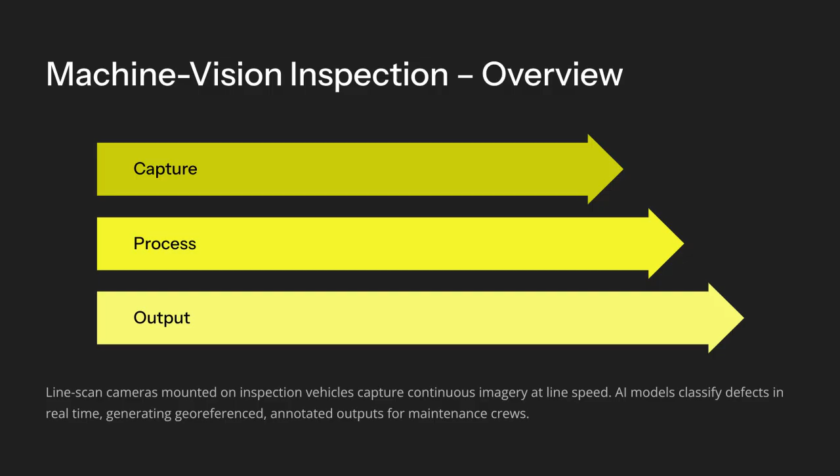And finally, there's the interpretability problem. When the AI flags a section of track, it's often a black box. It can be very hard to debug exactly why it made that choice. But don't worry, as we move through this lecture, we are going to cover the specific assurance strategies to tackle every single one of those challenges.

Now, let's look at the first pillar of RAMS, reliability. In this context, we are talking about the system's ability to do its job without failing. On the positive side, AI vision systems can be a massive boost for reliability. They can spot early-stage defects, things like hairline cracks in the rails, tiny flat spots on a wheel, or even slightly corroded fasteners that a human inspector might miss or that are just too subtle to see on a single pass.

By catching these issues weeks or even months before they reach a critical threshold, maintenance teams actually have the luxury of time. They can plan and execute repairs during scheduled downtime, which means fewer surprises and fewer unexpected in-service failures. But this reliability isn't guaranteed. We face three major technical hurdles.

The first is misclassification. This is the classic false negatives, where the AI model looks at a cracking rail and says it's healthy. If the inspection misses that defect, a failure will eventually happen in service. This usually happens because the training data wasn't diverse enough or because the model wasn't tested against enough real-world messy scenarios. To assure this, we need rigorous validation on data that actually represents the real world, combined with constant accuracy monitoring.

The second challenge is distributional shift. Imagine a model that was trained perfectly for standard gauge tracks in the UK. If you take that same model and deploy it on a network with different rail profiles or fastener types, its performance can drop unexpectedly. The solution here is a core concept we have mentioned before, the operational design domain or ODD. You have to explicitly define the exact conditions where that model is valid, and you must test it on data from the new domain before you trust it.

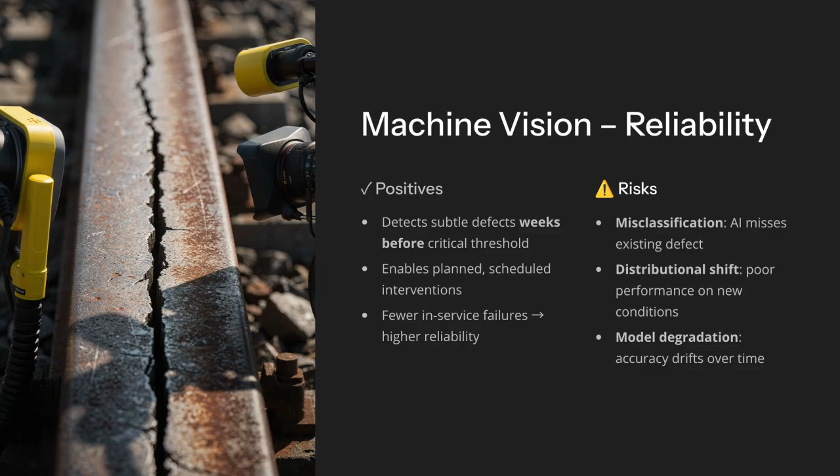So, the big RAMS takeaway here: to keep reliability high, you have to validate extensively before you go live, define your ODD clearly, and never stop monitoring once you're in operation. Next, we have availability. In the real world, this is all about how much of the time our tracks and trains are actually open for business.

On the positive side, AI is an absolute game changer for availability because it removes the human labor bottleneck. Think about it. A traditional manual inspection team might cover 100 kilometers in a week if they're lucky, but an AI vision system can run 24/7 on unmanned vehicles at full mainline speeds. A single system can cover over 300 kilometers in a day. Because you can inspect the entire network so much more frequently, you catch degradation early. This translates directly into more time for planned maintenance, fewer emergency interventions, and ultimately better availability of your trains.

However, there are some specific availability killers we have to design against. First, there's the risk of a single point of failure. If you rely entirely on one AI system or one set of cameras and that system goes down, your entire inspection capability collapses. You can't let your maintenance strategy be that fragile. You need redundancy, multiple inspection vehicles, and a clear, graceful degradation plan, like having fallback schedules for manual inspection if the tech fails.

Second, and this is a big one, is the problem of false positives. If your AI is oversensitive and starts flagging shadows as critical cracks, your maintenance teams are going to waste thousands of hours investigating non-issues. This is the efficiency paradox. If the AI is too noisy, it actually reduces availability by consuming all your maintenance bandwidth on ghost problems.

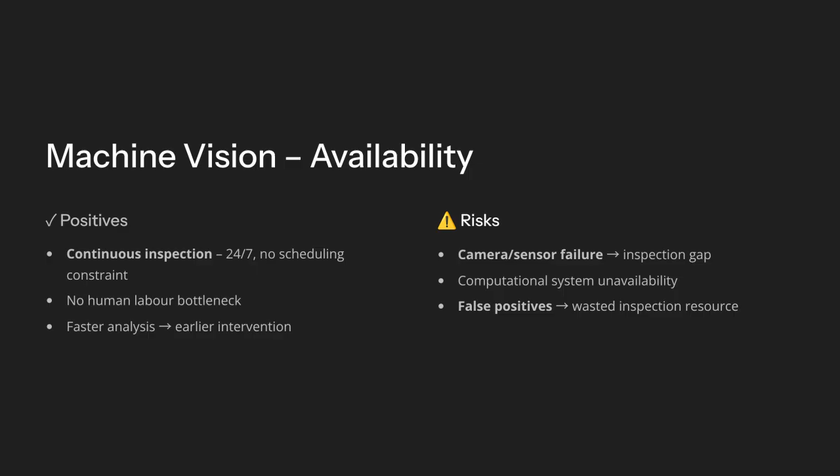You have to tune your thresholds to minimize those false positives, because even if you miss a few minor defects, it's often better than completely overwhelming your maintenance teams with bad data. The third pillar is maintainability. In our world, this isn't just about how easy it is to fix the AI, it's about how easily our technicians can understand and act on what the AI is telling them.

When it's done right, a vision system is a maintenance crew's best friend. It doesn't just shout defect here and leave them guessing. It provides a full brief, the exact GPS coordinates, the specific rail, the type of defect, and even the estimated severity. It can even tell them, I'm 95% sure this is a crack and you need to inspect it within 2 weeks.

This allows crews to show up to a possession with the right tools and the right materials already in hand. They can prioritize the high severity items first and plan their work sequence perfectly. The result? Faster repairs, shorter possessions, and a much more maintainable network. But we have to be careful not to create a trust gap. The biggest hurdle here is the black box problem.

Deep neural networks are notoriously opaque. If the model flags a critical defect but can't explain why, a technician looking at the image might see a bounding box but still feel unsure if it's a real emergency or just a weird reflection. To fix this, we need to use explainability tools, things like SHAP or LIME, that actually highlight which features in the image triggered the alert. We need to give them confidence intervals, not just a single number.

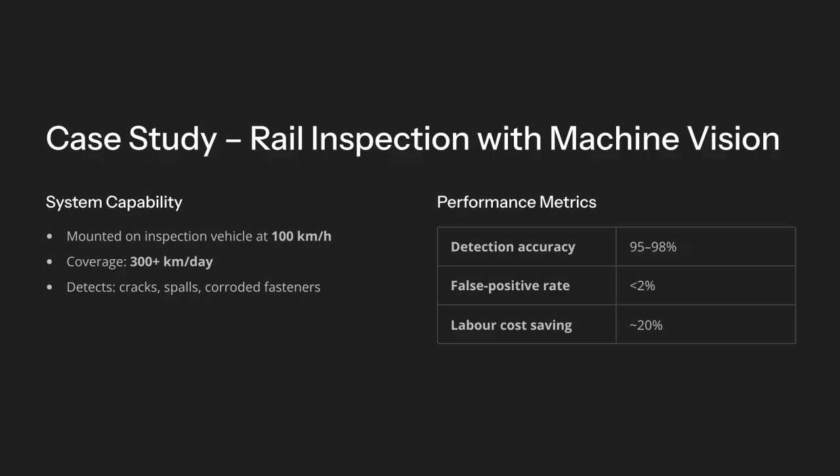Our second application is predictive maintenance. If machine vision is about looking for trouble, predictive maintenance is about listening for it. We use condition monitoring sensors, things like vibration, temperature, and acoustics, to catch the subtle signs of a component failing long before it actually gives up.

The setup is quite different from cameras. Here, we are installing sensors directly onto the critical hardware: rolling element bearings, wheels, gearboxes, and even the rails themselves. These sensors are constantly recording vibration signatures and temperature spikes, streaming that data to a machine learning model. The model's job is to extract features from that noise and predict what we call the remaining useful life, or RUL.

The reason this works so effectively is that mechanical failures almost always follow a predictable degradation pattern. In the early phase, everything seems normal to the naked eye, but the sensors pick up subtle vibration increases. In the middle phase, that degradation starts to accelerate. You'll see vibration spikes and heat building up. By the time you hit the critical phase, the component is screaming. You have rapid vibration and imminent failure. By monitoring for those early phase indicators, we can schedule a repair long before the situation becomes an emergency.

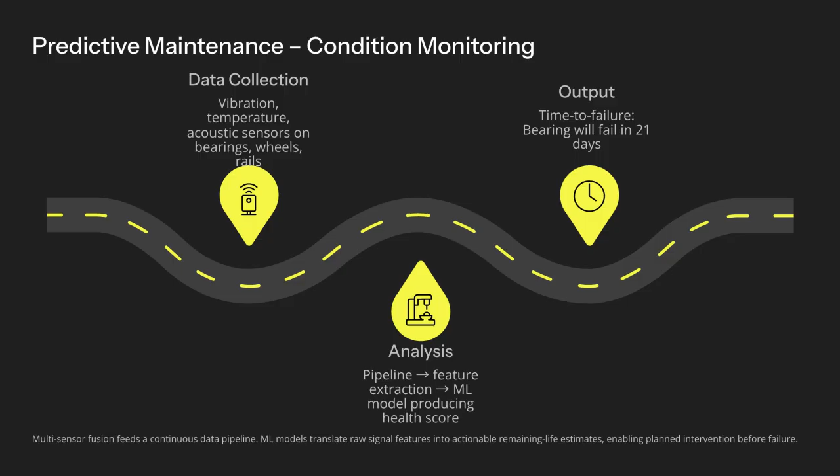And finally, we have distributional shift. A model that works perfectly for a wheel from supplier A might be completely wrong for supplier B because of different materials or manufacturing tolerances. As we did with machine vision, we're going to look at how to build an assurance strategy that manages these uncertainties.

Now, let's look at how this predictive approach shifts our RAMS balance. It's a bit of a tug of war between high-tech efficiency and real-world uncertainty. First, let's talk about reliability. On the positive side, we are catching degradation in its infancy. Fewer unexpected failures mean a much more reliable service.

However, we have a major blind spot: new failure modes. If the model was trained on historical data, it's essentially looking at the past. If a new wear pattern emerges because of a heat wave or a change in track geometry, the model might not recognize it as a threat.

The component fails and the system is caught off guard. To mitigate this, we have to commit to continuous learning, feeding every single unexpected failure back into the model to keep it evolving.

Next is availability. The big win here is extending component lifespans. Instead of pulling a wheel set every 5 years just because the calendar says so, we keep it running until it actually needs help. But the availability killer here is the false positive. If the model screams that a bearing will fail in 21 days, but it's actually healthy, you've just pulled a perfectly good train out of service for no reason.

If you have a 10% false positive rate across a fleet of 100 bearings, that's 10 unnecessary interventions a year. To manage this, we have to tune our decision thresholds. We might raise our intervention trigger from 70% to 85%. It's a delicate balance. You reduce the false alarms, but you have to accept a slightly higher risk of a true failure slipping through.

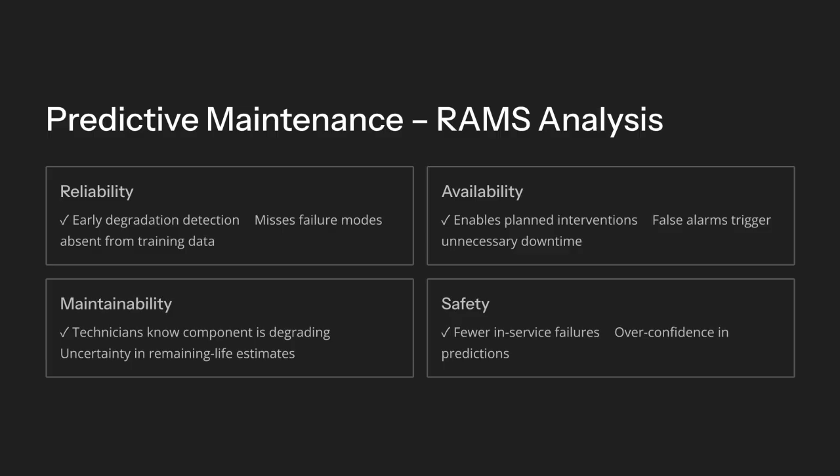The RAMS takeaway here is that human judgment must remain in the loop. We mandate secondary checks for high-risk components. If the AI predicts a failure, the technician doesn't just swap the part blindly, they perform a visual confirmation first. In the safety world, the AI is an advisor, but the human is the authority.

Now, let's get into the paperwork that keeps the trains on the tracks. We are going to walk through the technical audit for our bearing failure system using the same standards we applied to the vision systems. First, we look at EN 50126 and our hazard identification.

We have two main hazards here. The first is the nightmare scenario. The AI misses a bearing degradation and we have a catastrophic axle breakage in service. The second is the efficiency hazard, a false alarm that triggers an unnecessary emergency repair. When we assess the risk, the missed failure is high risk because it's hard to control once it happens. The false alarm is medium risk because while it's annoying and expensive, a technician can usually verify the bearing before they start taking the train apart.

To control these risks, we set strict boundaries. For hazard 1, we mandate a sensitivity of over 95%, backed up by weekly monitoring and an annual manual inspection of 5% of the fleet, just to catch anything the AI might have missed. We also define a strict operational design domain. This model might be a genius at predicting failures on freight trains for classes 66 through 68, but we declare it invalid for passenger stock or different bearing manufacturers until it's specifically revalidated.

Next, we move to EN 50128 for the software development. Here, we translate those safety needs into engineering requirements. We aren't just running a script, we are using a gradient boosted model that looks at vibration, temperature, and shock loads. Our validation process is rigorous. We test it on 1200 bearing recordings, and then we move to a 3-month operational trial at a single depot. We don't just look at the numbers, we talk to the technicians. If the AI says a bearing is failing, does that prediction actually make sense to the person looking at the hardware?

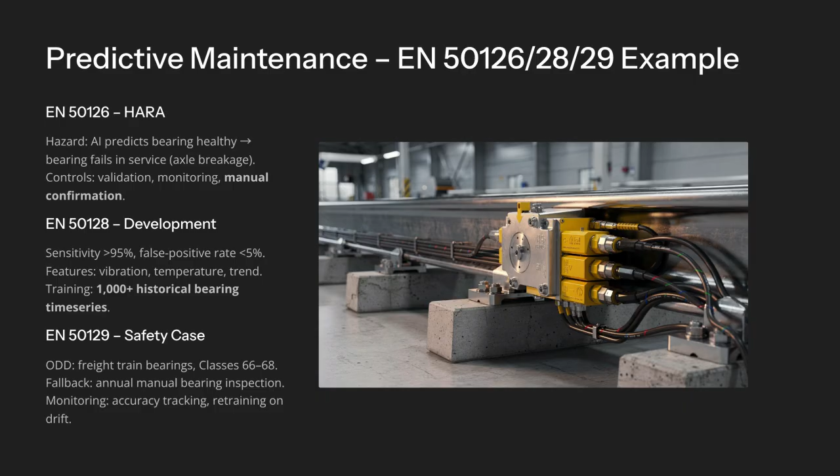By following this process, we move from guessing when a bearing might fail to having a defensible, certified system that we can trust with lives and cargo.

Finally, we reach the cutting edge of rail maintenance, digital twins combined with reinforcement learning, or RL. If machine vision is the eyes and sensors are the ears, this is the brain that optimizes the entire maintenance strategy. A digital twin is a high-fidelity virtual model of a physical track section. It mirrors everything: the rail profile, the ballast condition, even the local weather patterns.

Because this twin is synchronized with real-time sensor data, it doesn't just show us what the track looks like now, it uses a degradation model to show us what it will look like in the future. This is where the reinforcement learning agent comes in. Think of the RL agent as a strategist in a simulation.

It tries out different actions like replace sleepers now versus wait 6 months, and it receives rewards based on the outcomes. If it prevents a failure while keeping costs low, it gets a high score. If it lets a track defect develop, it gets a penalty. Over thousands of simulations, the RL agent learns an optimal maintenance policy that a human might never even consider.

For example, it might discover that on a specific heavy freight line, replacing sleepers slightly more often actually allows you to reballast less often, saving 15% in total costs while reducing incidents by over 60%. It's about moving away from one-size-fits-all schedules and toward a strategy that is perfectly tailored to every individual mile of track. However, while this is incredibly powerful, it introduces some of our toughest assurance challenges yet.

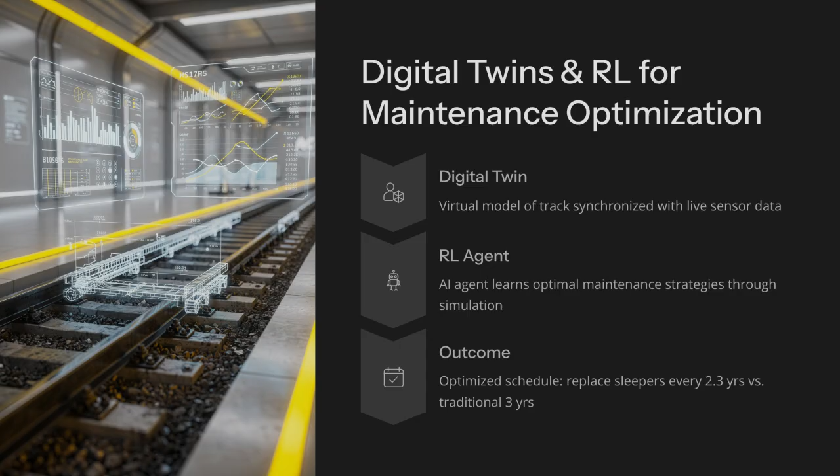When we apply RAMS to something as complex as a digital twin with reinforcement learning, we have to change our perspective. We are not just looking for a bug in the code, we are looking for a flaw in the AI's logic. Let's start with reliability. The core risk here is the sim-to-real gap. An RL agent learns by trial and error inside a simulation. But what if the simulation, the digital twin's degradation model, is fundamentally wrong? If the model thinks the track is sturdier than it actually is, the policy it learns will fail in the real world.

To assure this, we don't just trust the simulation. We validate the digital twin against 2 or 3 years of actual historical data to ensure the virtual degradation matches the physical reality. Before we ever deploy a policy, we run it against another year of unseen historical data to see if the AI's recommendations would have actually worked.

Next is availability. An RL agent is a cost optimizer by nature. If left to its own devices, it might try to under-maintain, skipping a repair here or there to save a few dollars, while accepting a higher failure rate than we are comfortable with. To prevent this, we don't just give the AI a goal, we give it hard constraints. We bake an absolute limit into its reward system. For example, the failure rate must never exceed 0.5%. If the AI proposes a policy that breaks that rule, it's rejected automatically.

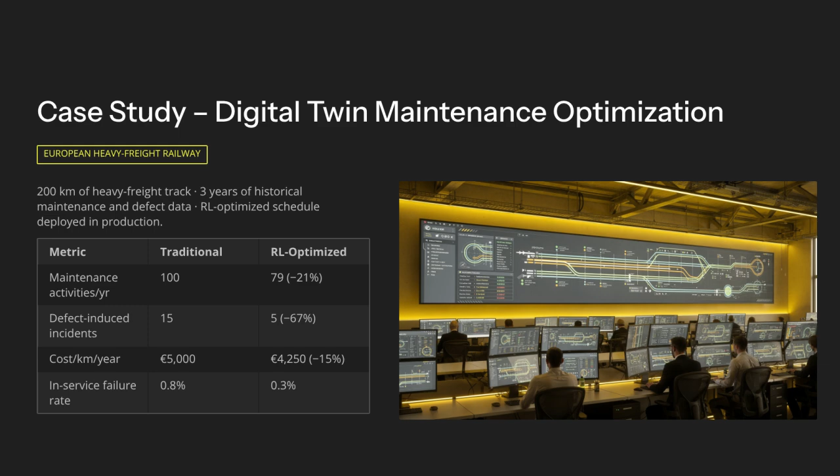We have covered a lot of ground today, looking at three very different ways AI is transforming rail maintenance. To wrap things up, let's look at how they stack up against each other so you can decide which tool is right for which job. Think of machine vision inspection as your foundation. Its primary purpose is to catch what is already there, the visible cracks, spalls, and wear. Its greatest strength is its speed and objectivity. It completely removes the human bottleneck from the inspection process.

From an assurance standpoint, your focus is on the operational design domain, making sure the camera sees correctly in rain, snow, or tunnels. This is a commercially mature technology, and it's usually the best place for an operator to start if they want to improve reliability and speed up diagnosis.

Next, we have predictive maintenance. This moves us from seeing to forecasting. By using sensors to monitor vibrations and heat, we can predict when a part is going to fail. This is the biggest driver for availability because it turns emergency repairs into planned interventions. The assurance challenge here is managing uncertainty. You need to know not just that a bearing is failing, but how confident the AI is in that timeline. This technology is maturing rapidly, especially for high-value components like wheels and gearboxes.

Finally, we have the brain of the operation. Digital twins plus reinforcement learning. This is about high-level strategy. It looks at the whole network holistically to find non-obvious ways to save money while staying safe. The assurance focus here is the most complex. You have to bridge the sim-to-real gap and ensure the AI respects your hard safety constraints.

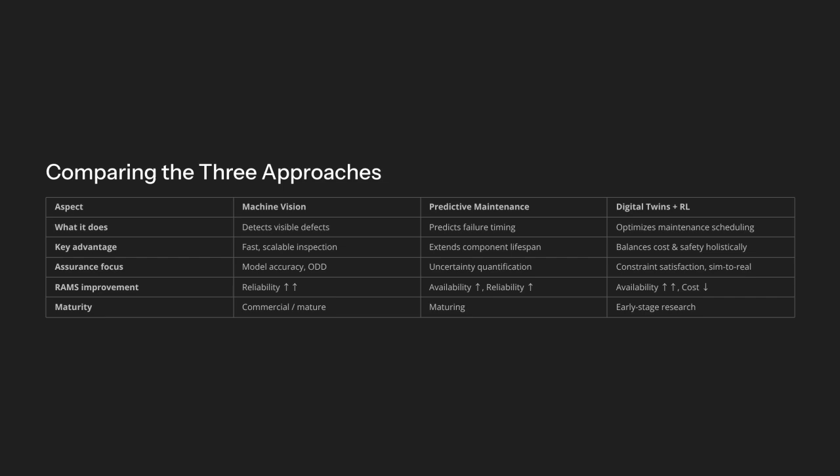Layer in predictive maintenance for your high-value assets where a sudden failure causes massive disruption, like bearings or traction motors. Invest in digital twins and RL once you have a solid foundation of historical data and the engineering expertise to manage a high-fidelity simulation. Each of these approaches has a unique RAMS profile, but when combined, they create a railway that is not just automated, but truly intelligent, safer, more reliable, and significantly more efficient.

To wrap up our technical session, we need to talk about EN 50716. Think of this as the essential update to the software standards we have used for years. It was created specifically because the industry realized that traditional software rules aren't enough when you're dealing with the unpredictability of machine learning. The biggest shift here is in data governance. Under this standard, data is no longer just a resource, it is a safety-critical artifact.

This means you have to document every data source and prove its quality. Is it complete? Is it accurate? Is it free from bias? You must have total traceability, meaning you can prove exactly which images or sensor readings were used to train a specific version of your model.

Then there is the requirement for reproducibility. In the past, AI was often seen as a bit of black magic, where you throw data at a model and hope for the best. EN 50716 ends that. You are now required to document your training procedures so thoroughly, including fixed random seeds and specific software versions, that another team could take your code and data and recreate your exact model. No more unexplained successes.

When it comes to operation, the standard mandates strict model governance. You have to establish clear KPIs like sensitivity and false positive rates and monitor them constantly. But more importantly, you must have predefined triggers. You don't just wait for a failure to happen. You decide ahead of time that if your accuracy drops by, say, 5%, you automatically trigger an investigation or a model rollback. Every update is subject to the same rigorous change control as any other part of the signaling system.

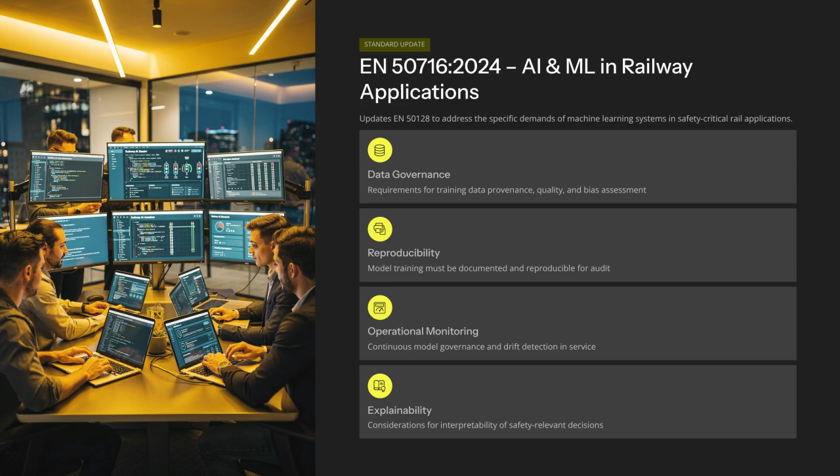But remember, the intelligence in artificial intelligence is only half the story. The other half is the assurance framework. Whether you are using a simple image classifier or a complex reinforcement learning agent, your job as a RAMS engineer remains the same. Define your boundaries, the operational design domain; verify your data, the EN 50716 standard; keep the human in the loop, the safety case.

By applying these rigorous CENELEC standards to these new technologies, we aren't just making the railway faster or cheaper, we are making it fundamentally more resilient. We are building a system that doesn't just wait for things to break, but understands how to keep them running safely for the long haul.

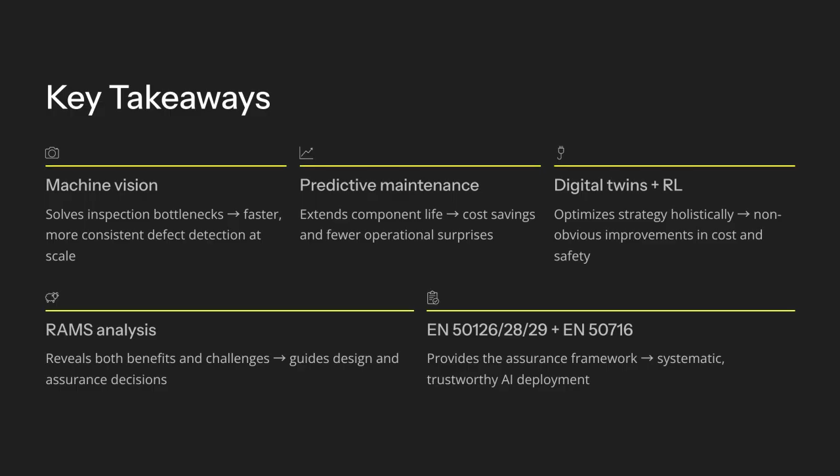Thank you for your attention. I'll see you in Lecture 5, where we take these same principles and apply them to the high-stakes world of signaling and autonomous train operations.

Before we part ways today, I want to leave you with 3 questions to help you reflect on your own specific context. Whether you are managing a freight corridor or a high-speed passenger line, your AI journey starts with these reflections. First, what is your biggest maintenance headache? Be honest about where the pain is.

If your teams are overwhelmed just trying to keep up with visual inspections, then machine vision is your immediate answer. If you're tired of seeing bearings fail on the main line and disrupting the schedule, then you need to focus on predictive maintenance. And if you feel like you have the data but your scheduling is still inefficient, then it's time to talk about digital twins.

Second, do you actually have the data to support that choice? AI is only as good as the fuel you feed it. For machine vision, can you start collecting high-quality images of defects during your current manual checks? For predictive maintenance, do you have at least a year of sensor data tied to actual failure records in your CMMS? And for digital twins, do you have the 2 to 3 years of degradation history required to build a faithful model?

Third, what does a safe pilot look like for you? The biggest mistake you can make is trying to boil the ocean on day one. Don't try to automate the whole network. Pick a 50-kilometer stretch or 5% of your rolling stock. Prove the concept, build the confidence of your technicians, and then scale.

As we look ahead, in Lecture 5, we're going to shift gears from maintenance engineering to operations and traffic management. We'll see how AI is moving from the maintenance shed to the control room, transforming how we actually move trains across the network. And finally, in Lecture 6, we will tackle the most human part of this journey, ethics and human factors. We'll explore the critical considerations for deploying AI in an industry that, at its heart, will always be safety critical and human dependent.